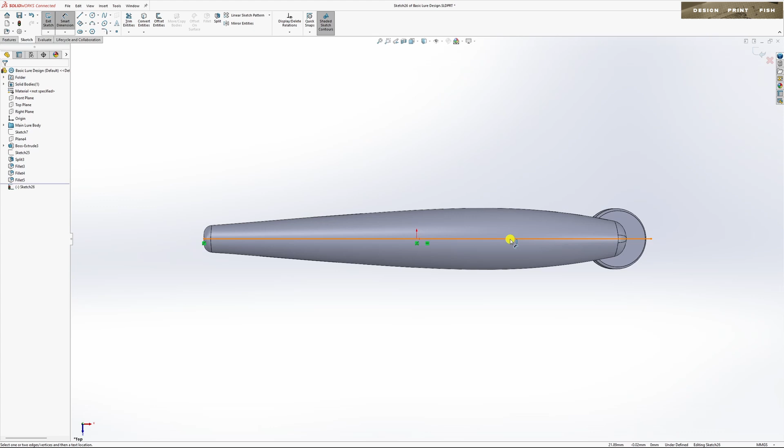Okay, so episode 3. First thing I do when we're at this point is to actually split the whole body. Everything we do from now on will just mirror at the end. So we will do a sketch on the top plane. Call it 105. Oh, what happened? 105. There we go. So exit and split, cut the part, cut that part, consume, tick. Hide that sketch.

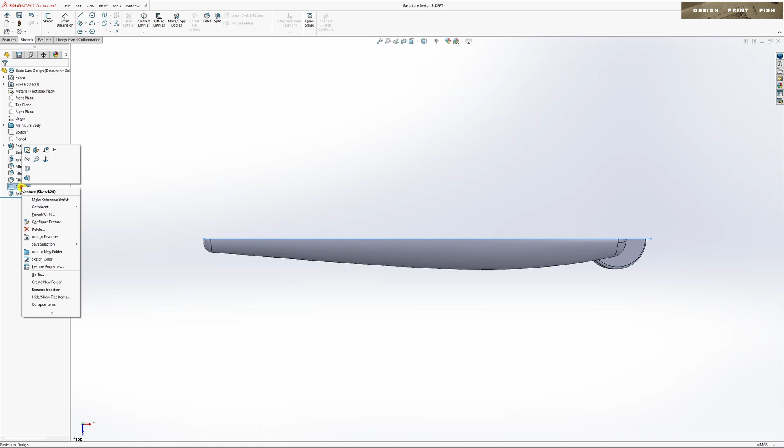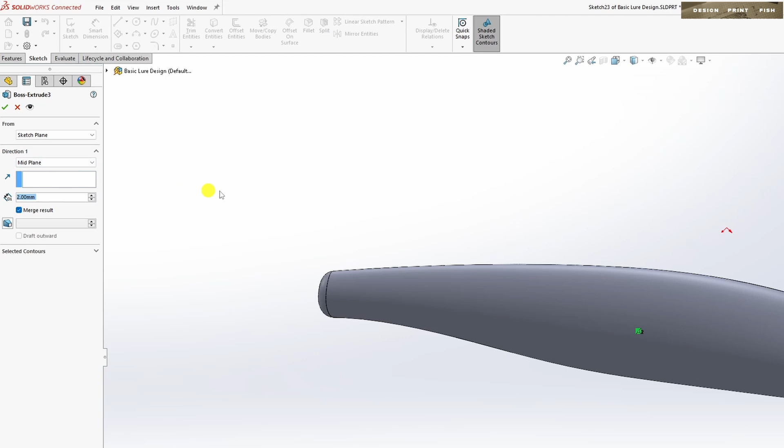Okay, actually a couple of things I just want to check up on. You'll see I put a correction in on that bib build on episode 2. So see how it's blind. We actually want to make that mid-plane. So if I Control Z and then put it back, Control Y, yeah, that's where it should be.

And the other thing I was just going to mention quickly is organizing our tree items over here. So we'll grab these ones and add them to a new folder, which is bib build. Rename all these.

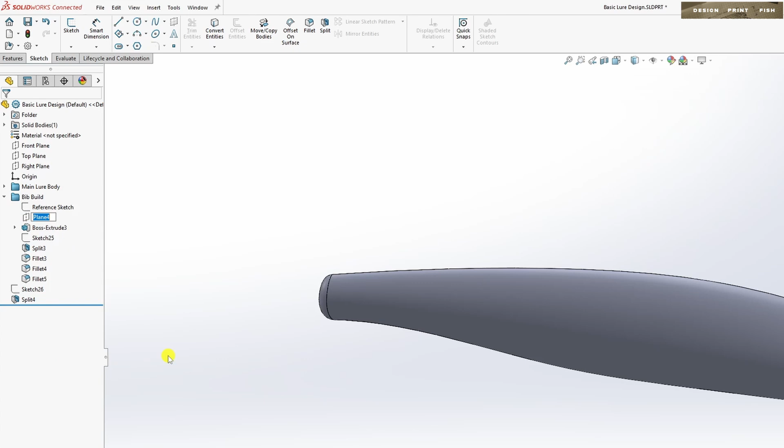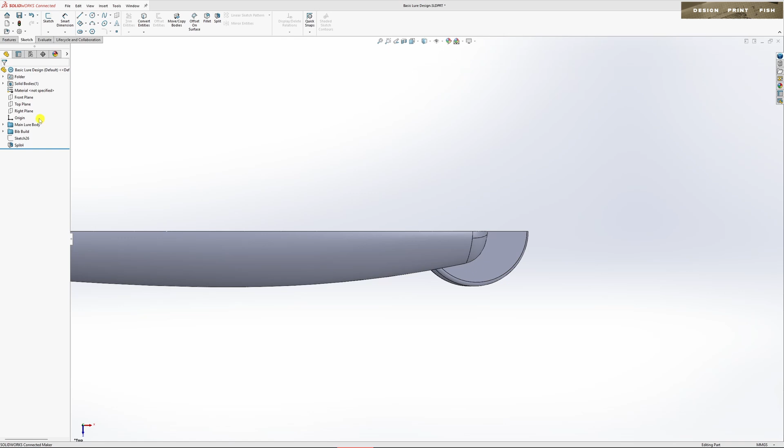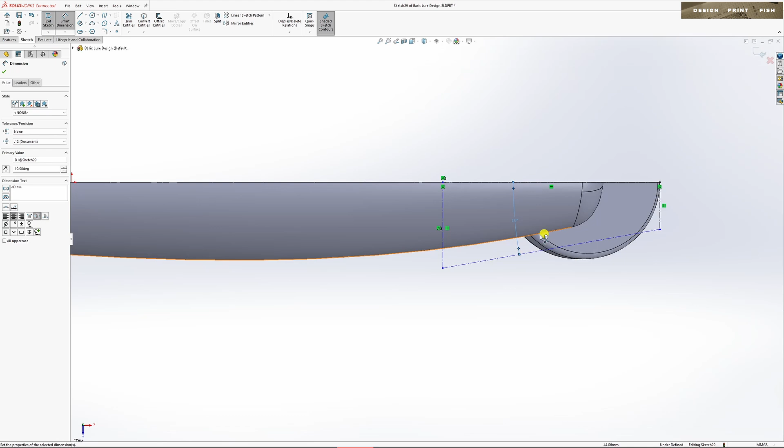Okay, so when I draw my eyes, I prefer to draw it on its own plane, and what I like to do is create that plane pretty well parallel to this line here. So we'll start with a reference sketch on the top plane. Put some dimensions on this to fully define it. This is 10 degrees. So see that 10 degrees makes it pretty well parallel with this curve here. And we want it just off. So 2 puts it pretty well perfect.

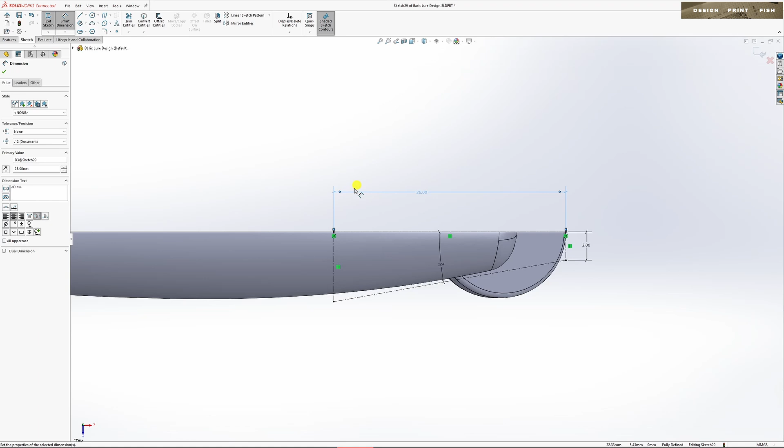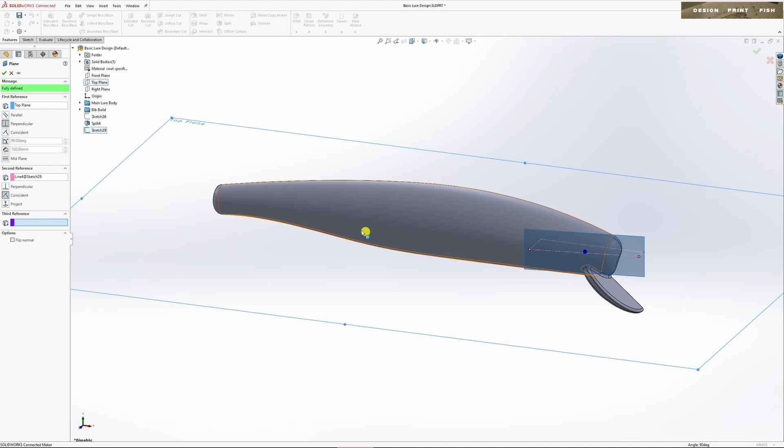What have I done here? Trim that. So one more dimension just to make sure it's fully defined. And that's it. So again, we'll exit and come over to a reference geometry plane. So the first reference will be the top plane, second reference, the line we've just created. And you can see that plane is where we want it. So we'll go with that one. And we'll hide the sketch and hide the plane.

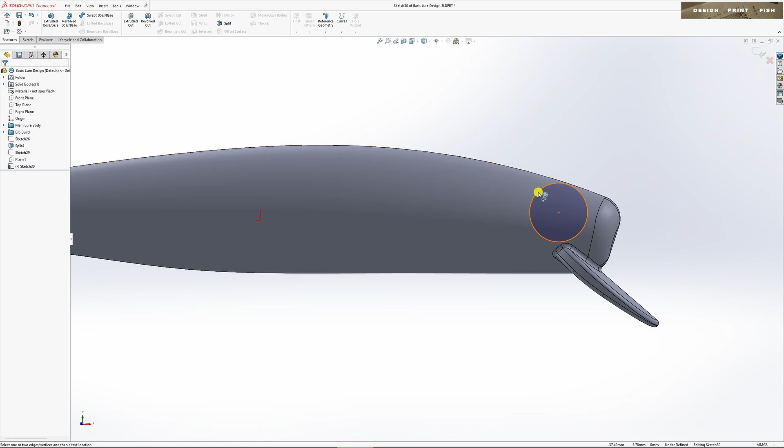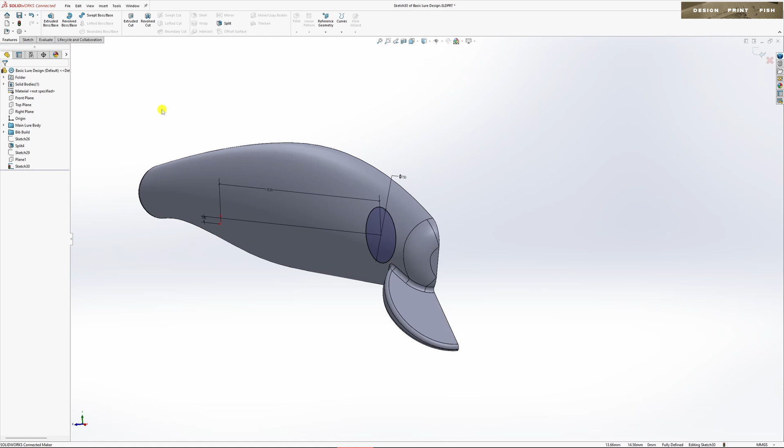And new sketch on the new plane. Circle. Just some dimensions. So this is going to be a 6mm eye. The eye that you'll end up putting in here will be a 6mm eye. It's 0.8. So that's it. That's where we want our eye. Now we can extrude that. So we exit. Now go up to surface, this surface, tick.

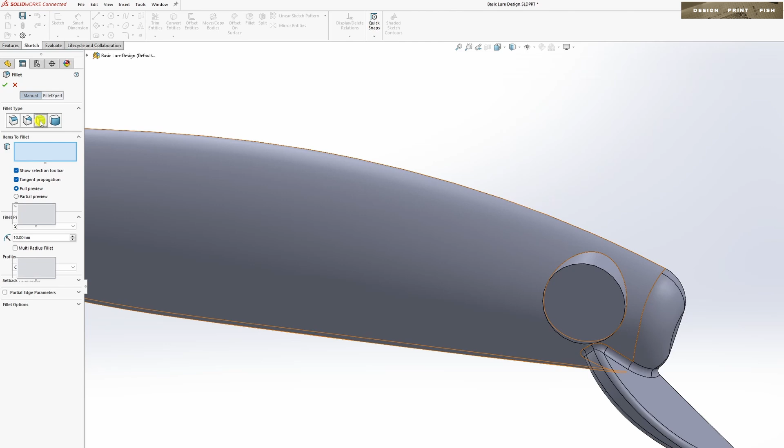So we'll put the fillet on here. This is like a face fillet. So select face fillet, and we want this face and this face. Oh. Delete this face here. And we just want to hold the line, which is this line. And that's it. Give that one a tick. There we go.

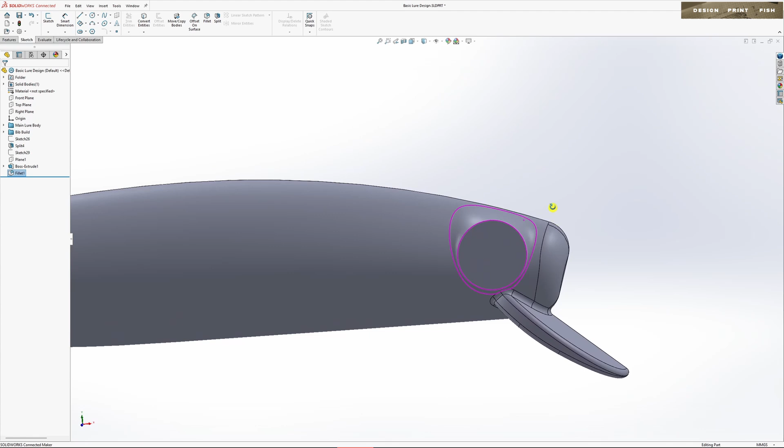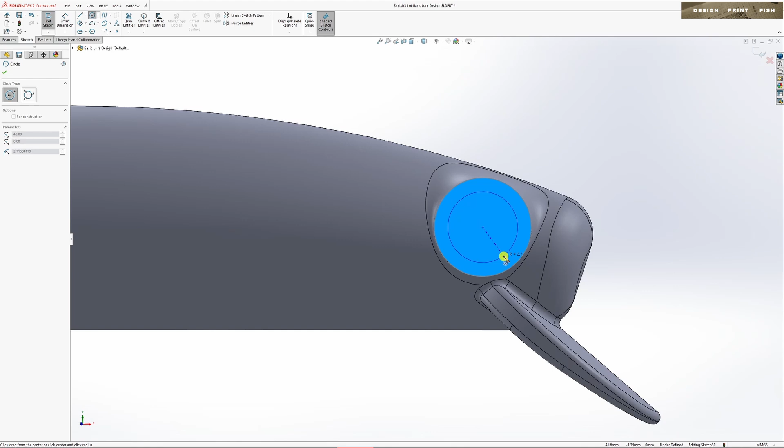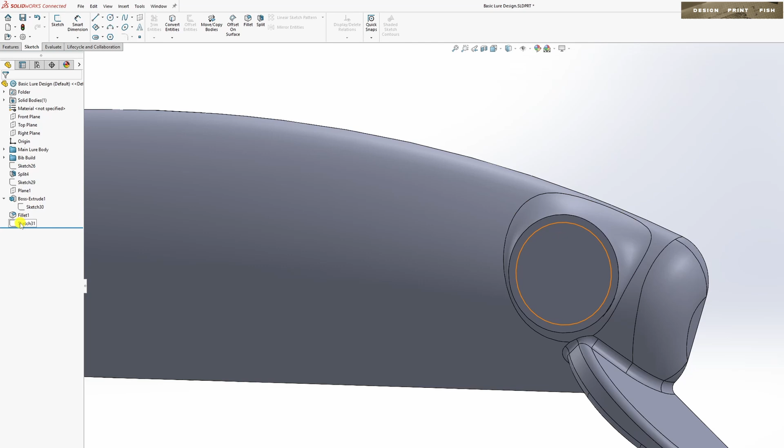Now, actually we need to see this sketch because we want that center point of that circle, and we want to start a sketch on this plane directly. And we're going to go dimension 6.5, which will fit snugly a 6mm eye. Exit that sketch, turn that sketch back off. But we will now just cut this one. 0.8.

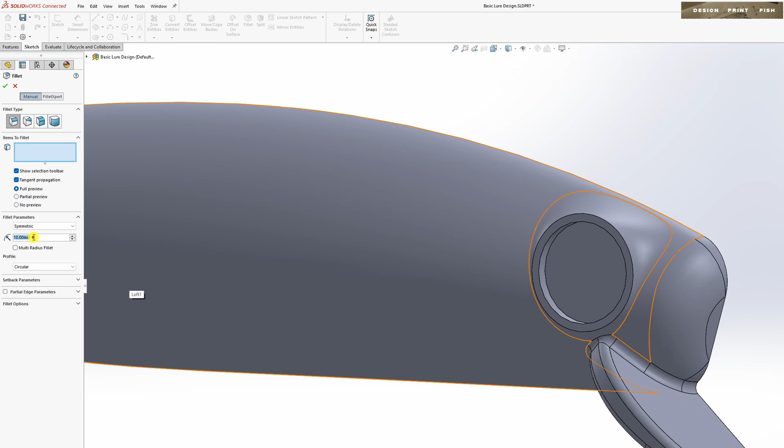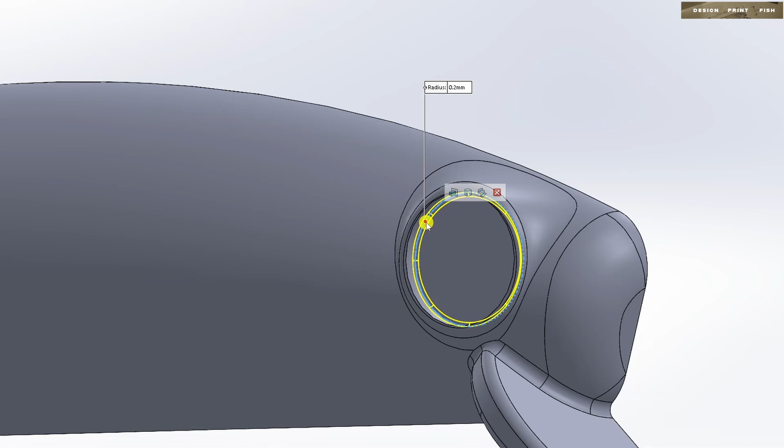So now we've got that, and just a couple more fillets. Back to just the normal fillet. 0.5 on the outside, and that one there. Actually, no, that's not right. Go with that, and then another fillet, and we'll go 0.2. We go this one and that one. There we go. That's our eye.